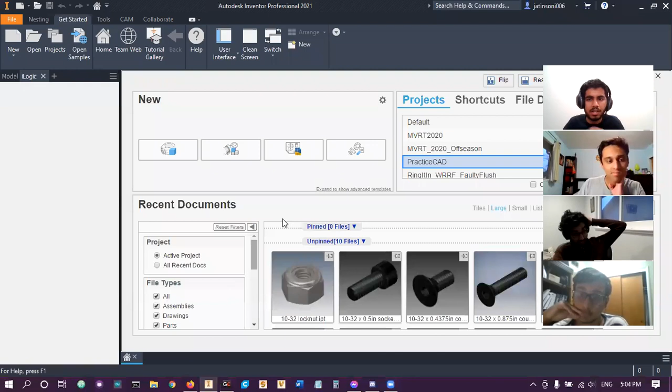So yes, first day of CAM training, what we did was we took this backplate here from a gearbox from a random catathon, and we basically cammed this. If you have Inventor CAM installed correctly, you would have a CAM tab on top. And what we did was we created a setup. So that's setting up where we're going to cut, how we're going to cut, which direction we're going to cut in, X, Y, and Z.

And then you have templates for camming, which have drill, adaptive, pocketing, and then the final shape. And then we also covered the difference between end mill and drill because they look similar. If you're machining for the first time, you might confuse them, but they're very different. A drill has smooth sides, so it only cuts up and down. An end mill has sharp sides, so when you rotate it and move it along a piece of metal, it'll cut a path out.

And then we just went through step by step how to CAM. There's a recording that's uploaded to the website, so in case you want to actually see the process, you can look at that. So that was that day. Going back to today, we're gonna cover nesting.

So basically, when you're machining during the season, you generally don't machine a single piece, right? If you have a drivetrain gearbox, you have a back plate, a front plate, and you have two of those because you have two gearboxes on the drivetrain. And then we do two robots, generally a practice bot and a comp bot, so that also multiplies everything by two. So you're gonna have to cut out a bunch of pieces at once.

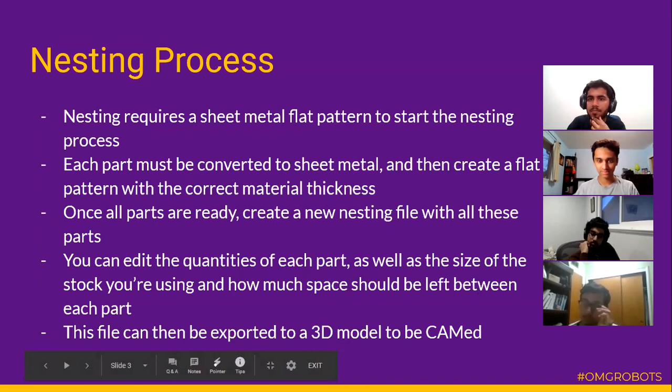Let's see, there's a chat. Oh, okay. All right, so do you guys have any questions as of now?

By giving the stock dimensions, does that mean if you restrict one, will it be adaptive in a direction? Does that make sense? Yeah. So you're basically restricting how big it can be. So it'll basically try to adhere to the dimensions you give it. And if there's just not enough space, it'll tell you that it doesn't work. It'll show some parts in red, so you're restricting it.

In terms of can you only do one dimension? I don't believe you can just say I have something that's 8 inches narrow, but I have infinite space. But you can just enter something like 48 inches. That's a lot. And so it'll be similar to if you did infinite space. Yeah. Okay.

Okay, if you don't have any questions, we can get cracking. All right, so we're back to this plate. Let me check again. I think I didn't save changes last time, so the thickness is off on this thing. This is one of my first CAM-a-thons, so this is very bad. But we'll change it to 1/4 inch aluminum, and we'll begin from there. Right, so I have my gearbox plate. I did CAM it last time, but I deleted the CAM.

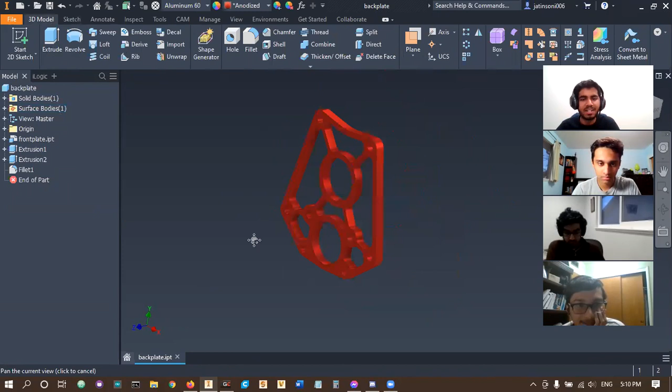And so what we're gonna do first is just convert it to sheet metal. So if you're in 3D model mode, on the top right, there's a button for converting to sheet metal, and you just click it, and it becomes a sheet metal part. All right. And so here, the first thing is if you click on sheet metal defaults, this is where some of the properties are.

And so if you set your materials correctly, it should already be there. Now, the important thing here is thickness. So it says here, checkbox use thickness from rule. We want to disable that, and we want to set the thickness to what it actually is, right? So obviously this is a 1/4 inch piece, so it should be 1/4 inch.

Yeah, it doesn't automatically pick up the thickness from your part. So you have to manually set that to whatever it is. If this was like an 1/8 inch part, you would say 0.125, or 16th inch, right? So on and so forth. Hit OK. So that's step 1 done.

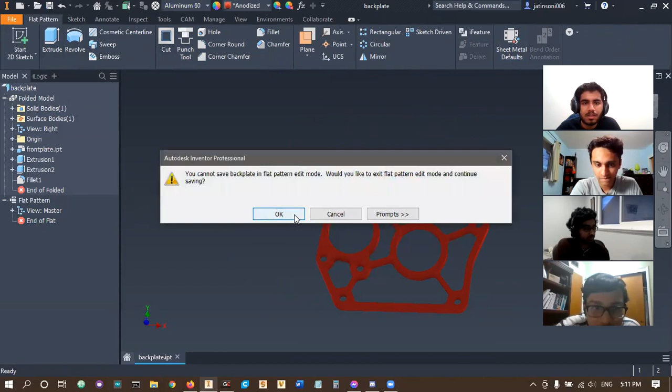And then the final thing we do is create a flat pattern on the right here. And it creates this flat pattern. You can see it's flat. That's all you need to do, right? And then you can save the file. Yeah, okay. So basically you can't save it in flat pattern mode.

It's like sketch. So you can just go outside of flat pattern, go to flat pattern, and where did that button go to go back? I'm confused. There is a button that says like go back to normal mode, but for some reason it's not there. Anyway, you create a flat pattern, you're done here, you save it, and then you close.

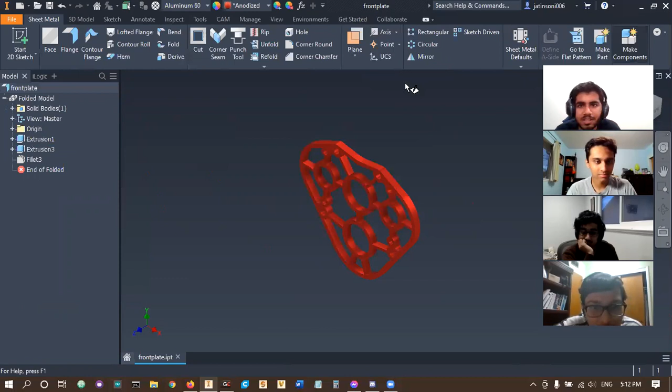All right, so actually I'll do another part because we're gonna show multiple files, right? So here's a different gearbox plate that looks to be 1/4 inch. So convert to sheet metal. Oh, contains features that are unsupported. Oh, I think that's the rule fillet. Okay, whatever. We'll do something without fillets, which sucks, but whatever. Sheet metal, use thickness, so 0.25, hit OK, create flat pattern. There's our flat pattern, save it.

There it is. Right, so now if you go on new, this is where if you have nesting installed properly, if you scroll down, there's now a new option, standard.inest, right? So this is what a nesting file is. So you hit create, and it'll take you to this tab, and it looks a little bit weird, but first thing is you go on sources. So this is where we're going to import our files, right? So you click on source files,

and you just click on the files you want to do. If you hit open, it will try to import them. Here, this box is your check to make sure everything's correct. So in case you forgot to change the thickness, here would read the 0.12 thing, but we changed it correctly. So it says 0.25 inches, aluminum 6061. Hit yes. And then it opens this thing.

You can expand it if you want to look at it a little bit more. You hit OK. Oh, what happened? Okay, Inventor just lagged out a little bit. Yeah, so we have it here. So you can see that's what the flat pattern is like. It's just a 2D face of whatever you're working with. So next thing we do is create nest study. And so here we can change our parameters. So you can change the name if you want to.

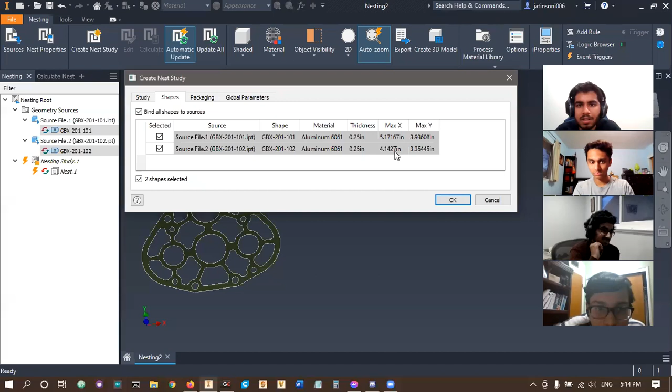Let's see. Here you can select if you want to unselect something. Here are their dimensions, right? And then packaging. So this is where you do how big your stock is. And I believe you have to edit the packaging elsewhere, right? So for now it's 39 by 19 and that looks okay. All right, we'll just go with it. And then global parameters, that also looks okay. So we'll hit okay and it'll do some loading and it creates that.

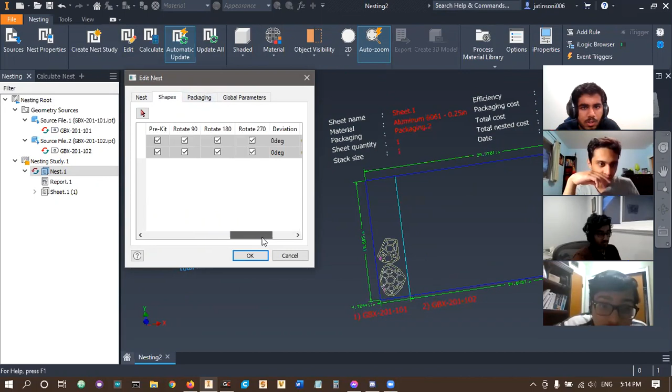There's our nesting. You can edit the nest. So if you click on nest here, you can edit it. And I believe this is where you change quantity. Yeah, it's been a while. That's why I'm saying I believe, but I'm not super sure. All right, so here you change quantity. So I'll just make this 3, for example. We can make this 2, right?

And then you can do other things like you can rotate it, you can mirror it if you wanted to. But we don't need to do that. So we'll hit OK. And then it'll automatically update. And there we go. So that's what it's doing. You see that? We have 3 of these, you have 2 of those. And I'm trying to find where the minimum distance thing is. So where did it go? Oh, there it is, right.

So item separation. Item separation is basically that minimum distance that should be between 2 parts. And so if I was using a 6mm end mill, which we generally use, it's like 0.23, so it's basically like 0.25. And so if I was doing this, I'd just do 0.55. Where did I get that 0.55 from? It's 0.25 plus 0.25, that's 0.5, and then plus 0.05. It's 0.05, not 0.005. I think I misspoke last time.

Wait, where'd you get the 0.25 from again? Oh, so that's the diameter of your end mill, right? So if we're using 6mm, it's like 0.23 something. So that's close enough to 0.25. So I just use 0.25.

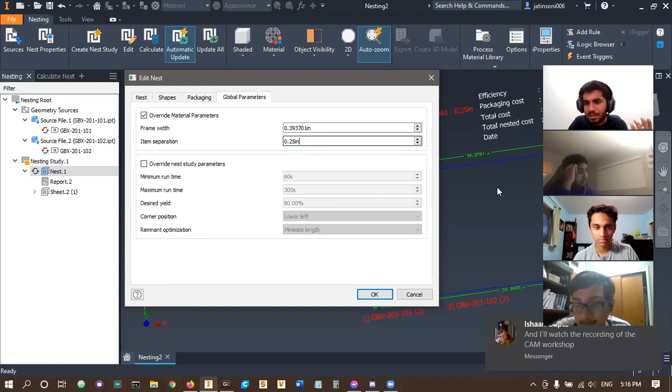Do you guys see notifications by any chance? Oh, okay. All right, don't worry about it.

Okay, so yeah, so I just do 0.25 here. And then this is like maximum runtime and stuff. This is basically if it takes too long, you can limit the time it takes, but we don't need to do that. Hit okay, and it should recalculate. And now the separation is bigger. You can see that distance between them is bigger, right?

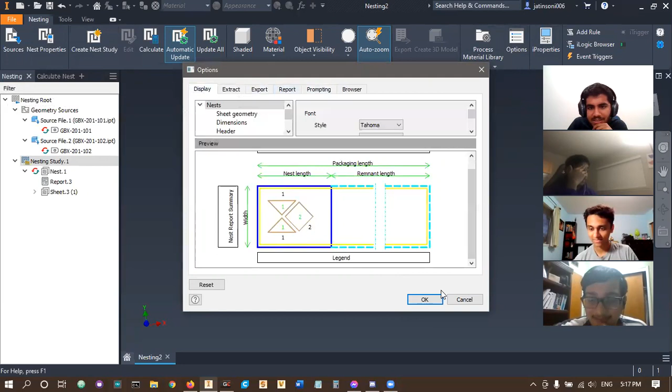So there's our part. Let me see if I can find the packaging thing, like the size. Oh, there it is, I think. Oh, okay, I believe I did do this in my video. I think I need to rewatch my own video to do nesting. But anyway, once you get to this step, you click on the sheet portion here, and you do create 3D model. Right, so this is what's going to create a 3D model.

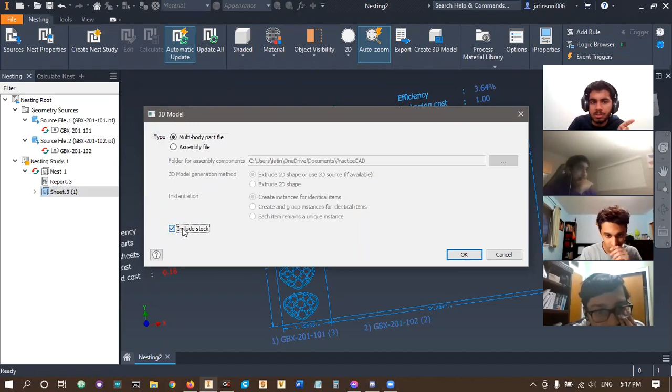Now here it gives you multiple options. We don't want to do an assembly. You can just do a multi-body part file. The difference is it'll create an assembly where each of your plates is a part, or it'll create one IPT file where each of your pieces is a body. Doesn't really make much of a difference, but we just do multi-body part file. And then you don't want to include stock. If you do, it'll create this huge rectangle and you're supposed to cut your pieces out within it, but we don't need that.

So we'll hit OK, and it will create a new part. There we go. So this is our new part, and it laid out all our files, and this is 3D, right? If you didn't set your thicknesses correctly, this is where it would be super thin or something. But you have your new part here, with all your gearboxes and things. And that didn't take me much time, whereas in assembly I'd have to figure out the best orientation for all of this.

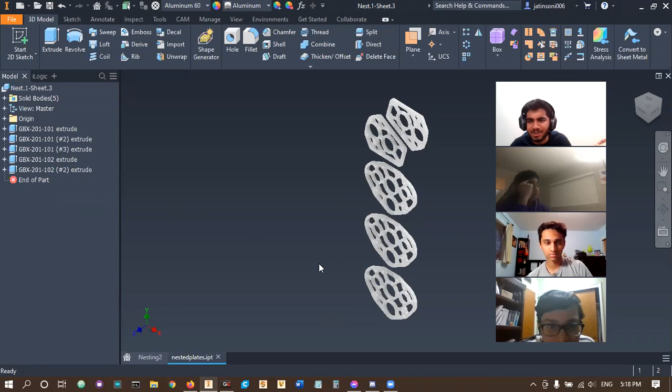So once you get to this step, make sure you save the file, and we'll just call it nested plates, something. Now this is where you can begin the CAM process. What we did 3 days ago, we're gonna do the same process here. So far, any questions on nesting?

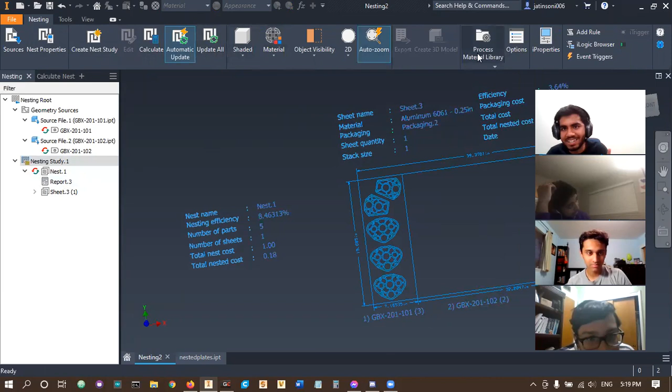So you had that layout thingy that gave a little box around it. How does it know? Is that a random value or is it based on the CNC that we use? Oh, so these values here? Yeah, that's the packaging thing I was talking about. You can set these values to whatever you want. I currently do not remember how you edit that value. I figured it out during the season and did that in my video, but I just arrived where I am right now, so I didn't have time to tinker around. Sorry for that.

Let's try something. What's he asking for again? Packaging, like editing the packaging. That's what I'm looking for. So this number is what I want to edit. Let's see. Can I create a new packaging or something?

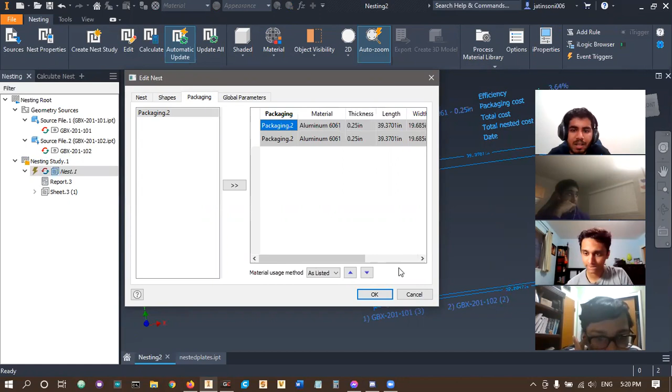Nope. Okay. Yeah, so it has to do with the packaging. You find the packaging, you edit that, so you create a new packaging basically. Packaging is just like where everything should go. That's your bounding sort of thing. Yeah, I'm having a hard time remembering where it was, because I have not done this since like fall season.

If any of you guys are on Inventor, you want to try to look around, that would also work. Okay, we'll skip it for now. If I figure it out, if we end before time, I can try and figure it out and do it. But what I'll do here is we'll redo CAM.

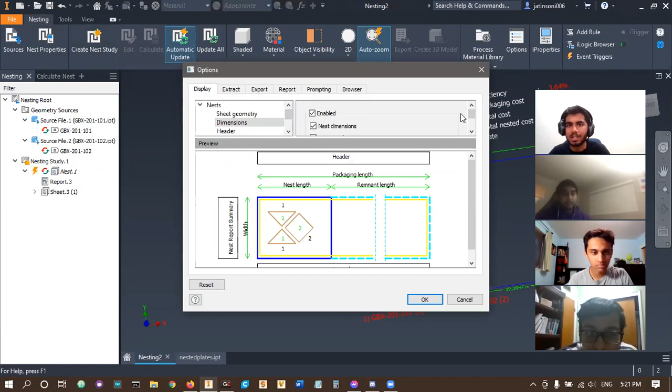For that thing under options, it had dimensions as well. Did you click on that? Where was that option? The thing that you're on, to the right. Like here? The options. Oh, options, that thing. Yeah. It said dimensions. No, I think this has to do with what it shows you. So all this green stuff it shows you, you can uncheck some of the things if you don't want to see it.

Let's see. Okay, yeah, I'll skip it for now. It's not a huge deal for nesting. There's more important things right now. You guys have to learn camming, which is far more important than nesting. So we'll revisit it, right? I'll make sure to send out a message saying how to do it. So don't worry, I won't leave you guys without tools.

But okay, so what I'll do now is I'll transition into CAM. So if you were here last week, how about you guys guide me through what I should do? So I am on the CAM tab. What should I do first? Setup. Setup. Do I click on it or what do I do? I have to be more descriptive, man. Click it. All right.

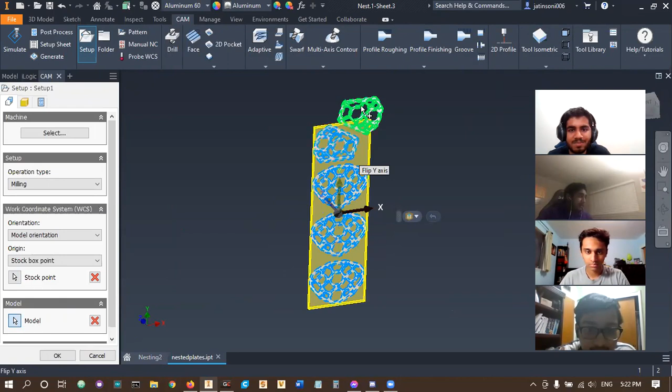Now what do I do? Click the model. So hit the model arrow, and then click what you want to select. I think click all of them. Yep. Click all of them. Sounds good. And then hit the yellow box and then remove all stock. No additional stock. Yeah. All right. Let's have a different voice. Arnav.

Now we have to set where the origin is. So okay. You have to scroll down basically. Scroll down. There's nothing here. Sorry. Maybe third tab. No, it isn't. Is it the second tab? Wait, were you on the first tab or the second tab just now? I was on the first tab, sir. Okay. It's the stock point. So you have to change the model orientation, or is it the stock? The model orientation. There we go.

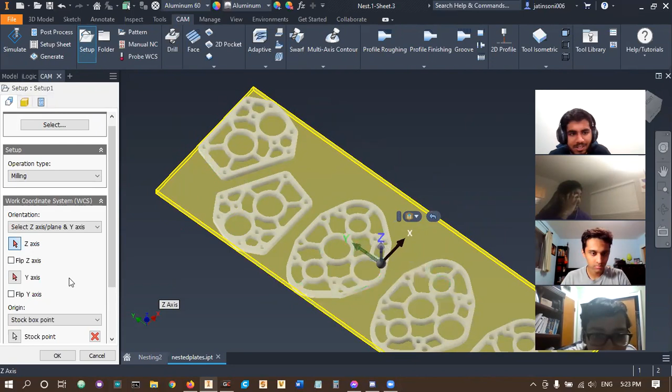Choose one of these. And then what do I choose? The z-axis should be up and down. So you choose the height of one of the plates. Oh, okay. The z-axis is already good to go, so I don't need to change it. And the y-axis would be the longer side. So these gearbox plates are, oh, we can actually do an x-axis. That's better. There we go.

I don't think Jonathan brought this up last time because he used a line, but you can also click on faces for axes. And so when I did that, it messed up the Z. Wait, doesn't that mean your origin point is on the center? Like when you had that little contraption. Oh yeah, I have to change the stock point as well. So which corner should I do?

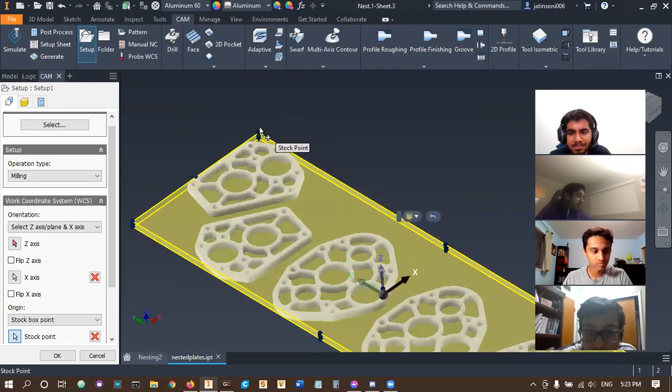This is based on the actual CNC, but generally when you're doing plates, we do the top right because that's how the Laguna and the Omi are set up. Don't you do any of the four corners? Yeah, you can technically do any of them as long as they are in the right direction. Like right now, if I were to cam this, you see how the X and Y are pointing out of where my plate is? My machine would basically try to go in reverse, and that's not going to end up too well.

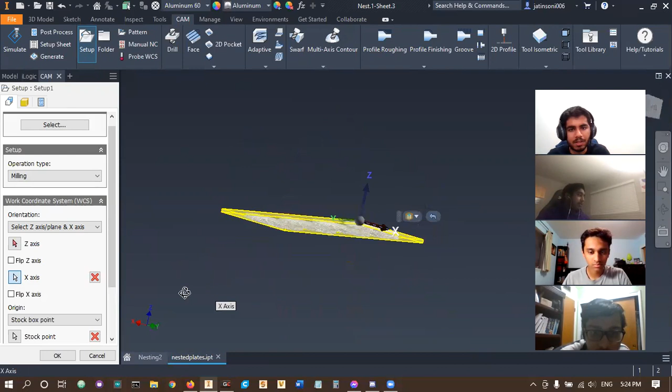So technically, if you put it on the bottom left corner, wouldn't that work? You wouldn't have to flip anything. Yeah, that would also work because then if I orbit 180 degrees, it's on the top right. So that also works. All right. So is our setup done or do I need to do anything else?

You guys can speak. I just saw a thumbs up. I haven't heard a single word. Okay. All right. Great.

All right. What's the next step? Should I do a contour? Malvika, what do you think? I don't remember, but I think the contour. So I do the contour? Are you positive? No. No. All right. So let's think about this, right?

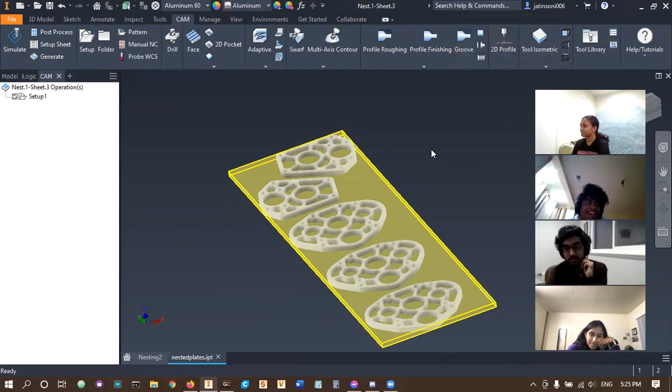If I were to do a contour, so this yellow box is like the aluminum I have, right? And the contour would be the outer shapes, right? So if I were to cut out the outer shapes, what would happen to this whole middle piece here? Like fly away. Yes. So how do I prevent it from flying away? The answer is not super glue or flex tape. So what should I do first then?

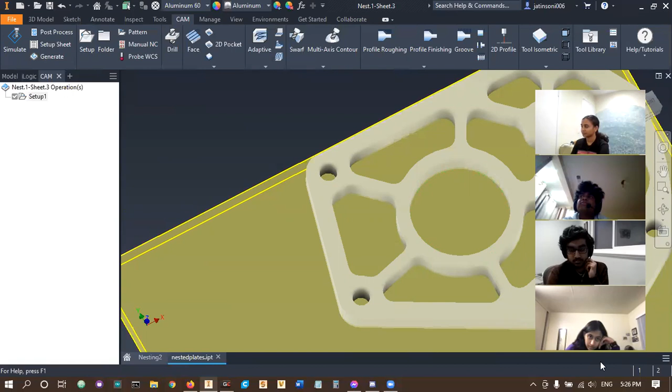I forgot what it's called, but like you have to do the inner parts, but I don't remember what it's called. Yes. So the inner parts could be the pocketing or the holes, but yes, we have to drill holes first, basically. So now that you guys know we have to drill holes here, how do I drill holes? Someone other than Malavika, Jacob, and Arnav.

Bhavik. I don't know, man. I joined late and I forgot this. All right, that's fine. Isn't there something like new operation or something? I forgot. Oh, Mr. President remembers how to CAM. Wow. All right. And then you just select the MBRT template. Yeah. Yes, there we go.

The drill. Which one from here? Drill, aluminum drill. Yes, that's correct. Okay, so you choose the right holes. Yeah, right click, create from template, aluminum drill. And then we double click on it. And then it loads and you pick on the hole you want to do.

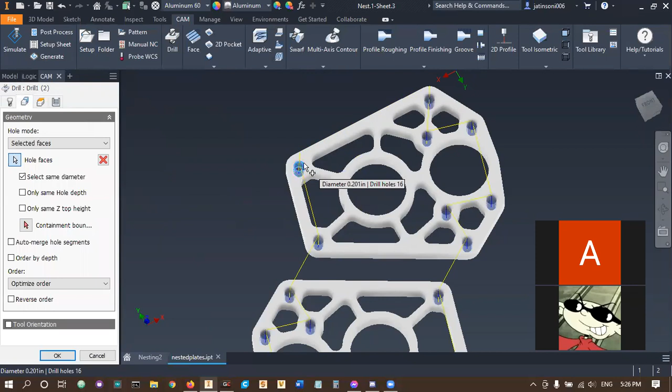So in this case, these are, I believe, 0.201, right? The tapped 1/4-20s. So you see how it selected all of those, right? But these ones are different sizes, so it didn't select them. Right, so what do I have to do here? I'm pointing to what is incorrect right now.

You have to change the size of whatever is drilling because... Yes, I have to change the tool. So you go in the leftmost tab, you click on tool, and then we said this was 201, right? So if you don't remember your hole size, you can still just press M, or maybe that's not gonna work. Measure, right? And you get your diameter there.

And then you double click again, pick on the hole, go in tool, change it, and make sure you have the MRT tool library. So you change to the 0.201 drill right there, select, and now you see the two cylinders are the same size, right? So there's that.

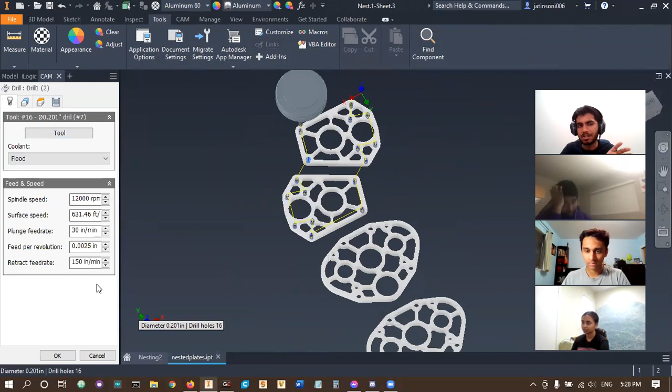And remember from last time, these speeds here are the base speeds that we have tested on our CNCs and they work and they're safe. They're not crazy or anything. So these are surefire speeds. You can go with them and it won't cause a problem.

When you're actually machining in the season, sometimes you might be pressed for time and you might want to change these to make it a little bit faster or slower. Also, if you have an end mill that's really dull, it's weaker, right? So you can't cut at the same speed, so you might want to slow it down a little bit. But other than that, you generally don't need to change these values too much.

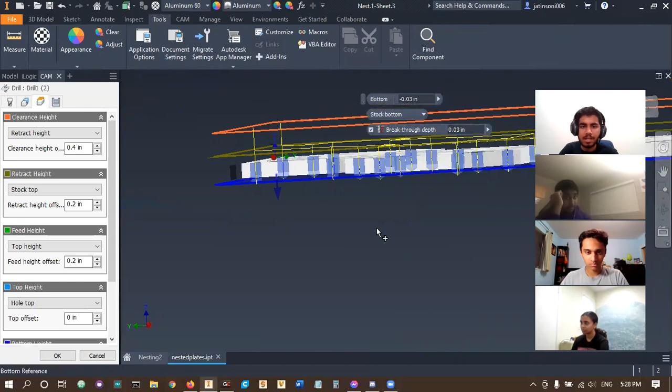And then these heights here, so I'm just doing this as a review of CAM. So if you find it a little bit boring, it's because I'm reviewing. But the heights here basically define, the orange was the safe height. This, I don't know what color, dark green, the retract height here is how far it goes up between two holes that it drills. And then the blue one is the bottom, how far it goes when it drills.

And you can see the blue is actually a little bit below our aluminum. And the reason for that is so that we make sure we cut through every single time, because our table isn't super flat, and it could have differences from one side to the other. But yeah, there's that. And then this last tab is basically how does it drill, and there's all sorts of options.

So the first one, called rapid, just goes in and out, right? But the problem with that is when you do that, you're cutting a lot of aluminum at a single time, and that can cause the drill bit to heat up and other problems. So what we do is called chip breaking. It's like a woodpecker where it goes down a little bit and comes back up, goes down a little bit more, comes back up, and so on and so forth.

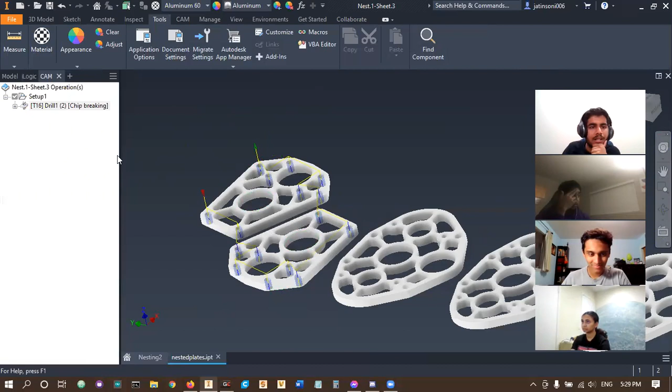And the numbers here are basically how far does it go down? How long does it stay there? Does it just pause and take a break? You do all that, you hit OK. There's our drill, right? And so I still need to do these two other hole sizes that are on this plate. So let's have a different voice tell me what I should do.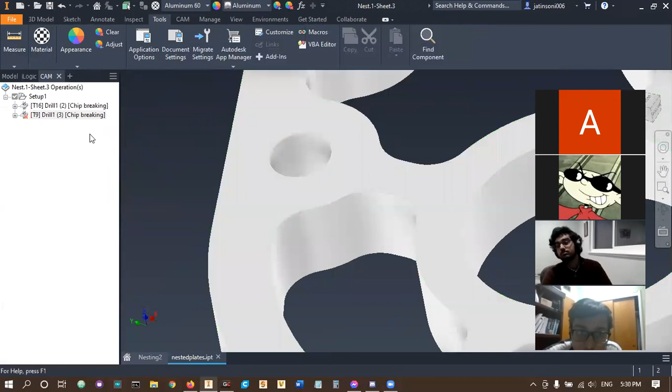You can just right click and use the same template that you did for the other holes. Mm-hmm. All right, I'm gonna do that. And then let's select this one. That one should be 0.196, but let's check. So I'll press escape, and why is my measure tool not working? Anyway, measure 0.196. So we'll go back here, click that hole, and then we have to change the tool. We'll go in here, MBRT library, change it to 0.196, select.

Again, the speeds change based on what tool you're using. And then same thing as before, right? The numbers are a little bit different, but it's the same things. You hit OK, right? And then the final one, aluminum drill, double click on that, and we'll pick the bigger hole this time. Change our tool to 0.257. That's the 1/4-20 clearance drill bit.

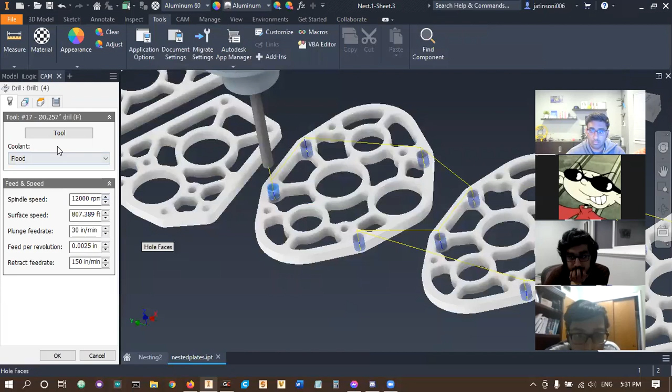And none of you guys are confused about why these numbers are what they are, right? The 0.196, 0.257? That's because 0.196 is if you're using 10-32 screws, they can slide through. 0.257 is 1/4-20 screws can slide through. And 0.201 is you want to tap the hole for 1/4-20s. The heights and the numbers there, okay.

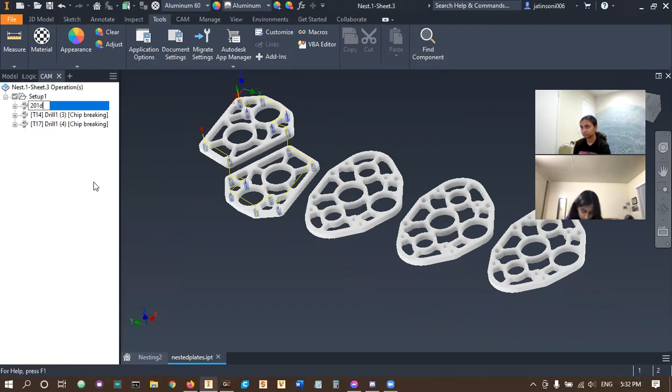Right, so another thing we didn't get to last time was we have these 3 different drill bits here. Obviously this is kind of confusing because it just says drill 1, and there's other numbers like T16, T14, T17 that signify which tool it is, but I don't remember those numbers. So what I generally like doing is renaming these. You can either right click rename or double click slowly and change the name to 201 drill, for example. And you can make this 196 drill. That way it's easier to identify it if you go back later and want to change something. 257 drill.

And generally what we like doing when machining is going in ascending order of tool size. So you'll start with the smallest hole, the 196 one, and you can just drag it to change the order, then the 201 and then the 257. The reason is when you're actually working on the CNC, it's easier to go up in an incremental order than a random order. It also helps because the smaller holes are easier to cut, so things vibrate less and you can put screws in and everything's fine.

So I have a question. Uh-huh. Don't you export each template individually in different files, essentially G-code files? Oh, the drills, yes. So couldn't you just rename it then? Couldn't I rename them? Oh, okay. What you're talking about is when we post-process, right? You can have a file name there. That's different because post-processing is the file that runs on my machine, the CNC. So yes, you have a name there, but this name is different because this name is inside my Inventor.

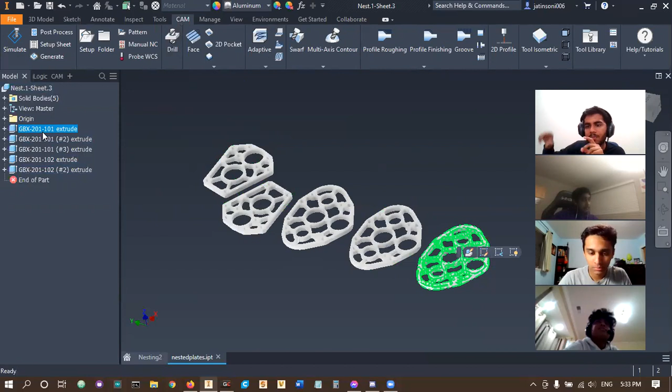It's like the equivalent of if you had a model called Gearbox 201 and you exported it into Cura to 3D print it, right? The 3D printed thing has a different name and this has a different name. The reason for writing a name here is so that if someone else opened this CAM, or if I open it later or go through it again, I can identify what it is without having to double click or measure. It's two different things. The two files are separate.

So that's why. Also, if you put the USB into the Laguna, it shows each process and takes whatever file name is given on there. So you can also use the name that you export it with. Well, that comes with the exporting name, but it takes whatever process you have as default. I think it takes it default, right?

Like if you were to post process a single 196 drill.

By the way, your camera's flickering. Yeah, give me one sec. I need to turn on the lights. Something happened.

But I'm pretty sure that if you were to export a single process, then it takes that name as the post processing file's name by default. So that's also good, because it doesn't really save much time, but you'd want that so that if you were to plug it into the Laguna, you know what process it is, right? Because if you have all your files on that USB, it's hard to discern the difference between each file. So yeah.

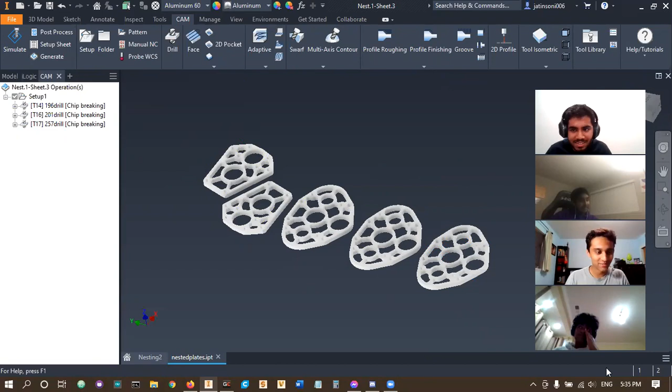That was an adventure. Okay. All right. Where the hell is your light switch? That was like 20 minutes. No, something random happened.

I don't know. Okay. So what should I do next? I'm done drilling all my holes, and if I was on the machine, I would put screws in them so that they don't fly away. What should I do next? Oh, create more templates for the pocketing. The pocketing. Yes. Should I also do a drill for the bearing holes? No, because we don't have a drill bit big enough. We have a drill bit that's big enough, but it doesn't work on CNC. So we'll do create from template.

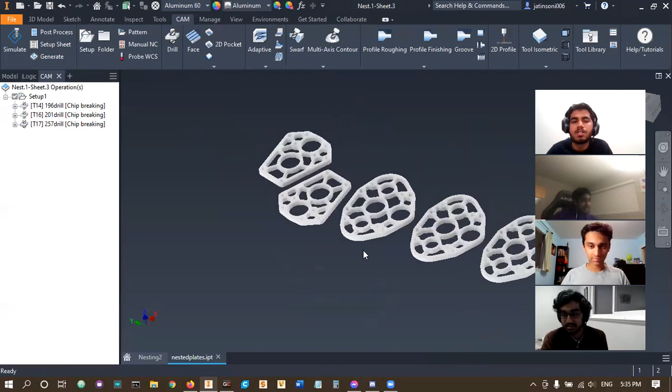Wouldn't it be better to put a hole in the bearing and then do a contour so that it won't take that long during adaptive? So that's a good question. You could do a contour and put a hole in the middle, but the reason why we generally don't do it is because, in terms of preparation when you're camming, let's see, how many bearing holes are here? 4, 6, 8, 10. There's 10 bearing holes. I would have to make 10 drill points here, right? So that takes me time in my CAM process. And then I have to actually go on the CNC and do that.

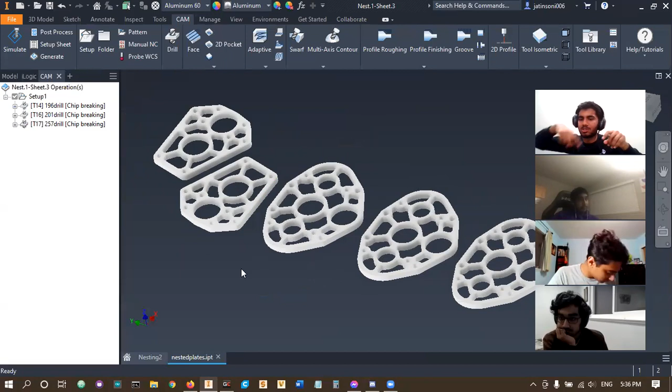And with those pucks, we call them pucks, the things that fly out, you can't use one hole. I know it's a circle, but you have to use 2 points so that the thing doesn't start rotating around that one place where you screwed it in. So you actually have to put 20 drillings here. And in real life, you would have to drill 20 more holes and put in 20 more screws so your bearing pucks don't fly out. So you do all of that work to save not that much time, because a bearing hole is only one and some inches wide and adaptive doesn't take that much more time than contour. That's why for this, we wouldn't do it.

Although if you had something like a swerve plate, let me find one. Where could it be? Give me one sec. Where is it? No, not that one. Where did it go? Okay. Let me just find it from here. So if you had,

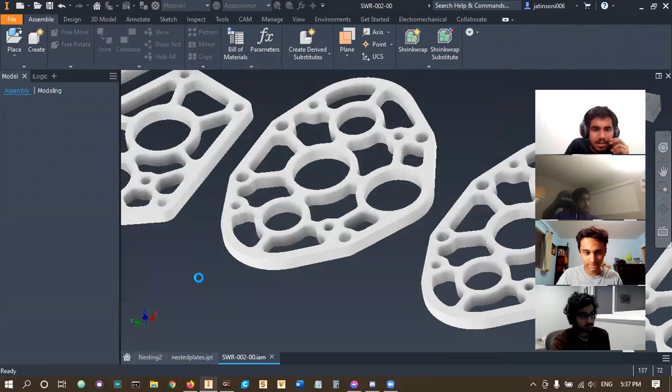right, if you had one of these plates with this huge 4-inch hole in the middle, now this adaptive would take forever. So this is where putting the screw holes in is actually efficient, because you spend a little bit of time in your CAM, but it saves you so much time when you're actually machining, right? But for bearing holes, it's not that big a deal. And we actually did this when we were machining the swerve for, what was the team number, 604, yes. It's been a while.

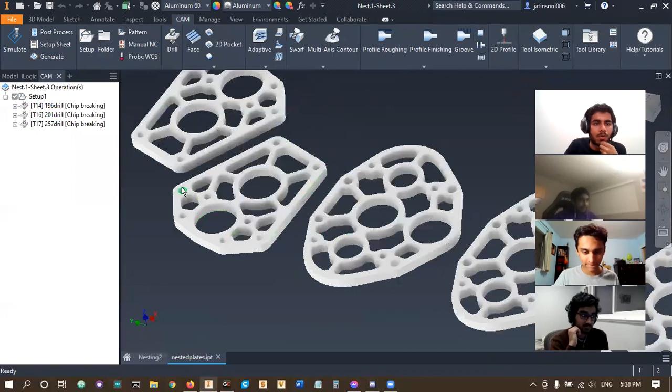Okay, there's a chat. Could you go over what I mean by screw holes? Okay, screw holes is, let me do contour real quick. So if I were to do a contour for, let's say, not that, this bearing hole here.

Let's simulate that with some stock. All right, so there it is. Okay, so when I do a contour, it creates what we call a puck. It's just this little piece of aluminum in the middle that's circular that can fly off because it isn't supported by anything, because everything around it is cut.

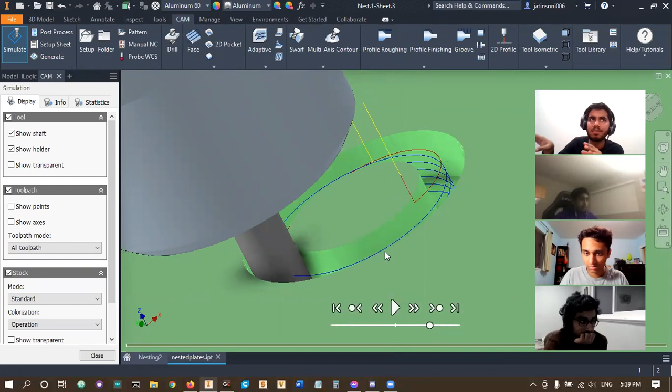And so a screw hole would be, you basically drill a hole in this middle piece before you do the contour so that you can put a screw inside it and so that it doesn't fly off. So that's what a screw hole would be in terms of pocketing and getting away from doing the whole adaptive thing. Yeah, so that's that.

So when you're drilling with the CNC, you use clamps? Oh, okay. Yeah, that's another good question. So when we were drilling the first holes, we have our huge piece of aluminum on the table, and we basically have clamps around the edges of that aluminum to keep it from going anywhere. And then once you drill the holes, you can hold down the parts where you're cutting. So yeah, we do use clamps for the edges basically.

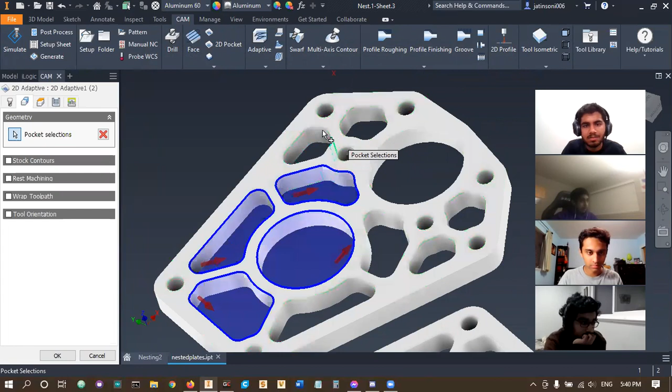Right, so let's delete that contour and let's do our adaptive. So create from template, adaptive, double click that. And then now we do the fun stuff, which is just selecting all the pockets. There's a 6mm end mill, so just select, select, select. Now if you're camming this, you can select every single pocket at once, right?

But the Laguna's handheld processor is not very good. It can't hold a lot of data at once, and because adaptive does so many circles, adaptive operations are really big in terms of file size. And so generally on the Laguna, if you were doing adaptive for like 5 different plates, it might just stop on the 3rd plate and forget what it's doing basically.

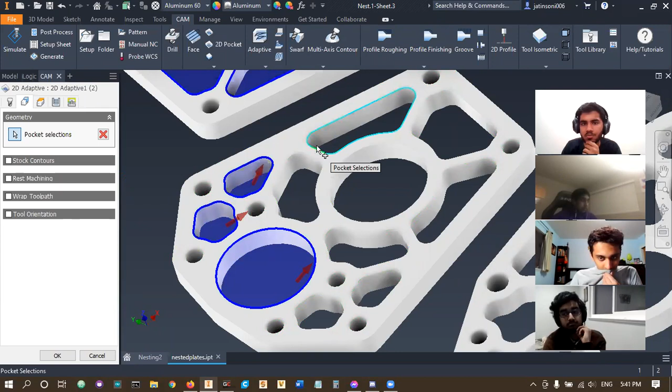So generally what I do if I was working on a Laguna would be do adaptive for all of the pockets on 1 or 2 plates, and then do a different operation, so that you split up the load between 2 files instead of just 1 huge file. If you're using the Omeo, it doesn't matter, because for the Omeo the controller is the computer you have hooked up to it, and Mr. Shinta's computers are good enough.

And then if you use your own computer, if you can run Mach 3, it's fine. It works. I actually had that problem. My old computer couldn't run a whole operation on the Omeo. Imagine.

Also, similar to any other process in CAD, if you accidentally select something that you don't want to, just shift and click again. So I'm gonna deliberately select this one, and that's wrong. So I'm gonna press shift, and I can click on it again, and it goes away.

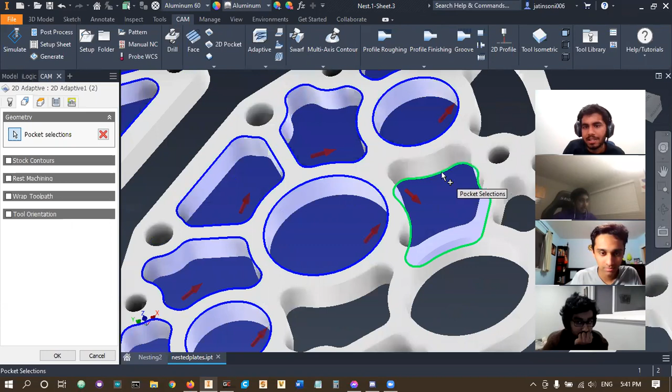Yeah. It's very easy to mess up, as clearly Jatin has messed up like 5 times so far. Yeah. Don't mention that.

If you were to mess up, then shift click is the easiest way. You don't have to stop, you don't have to delete everything and restart. So if you were going to use the Laguna right now, you would only select those 2 first plates and then hit done, okay, and then create a new adaptive operation. Yeah.

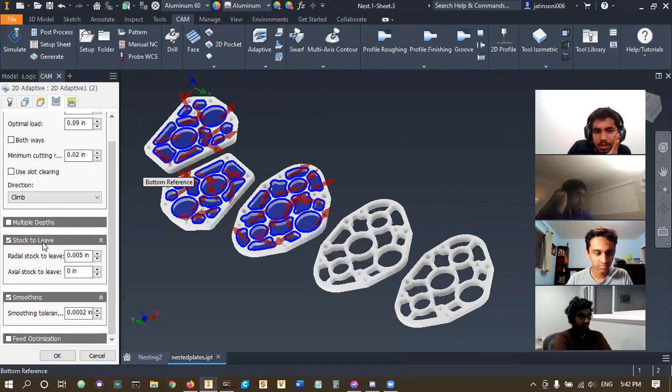So for the sake of time and not boring you guys watching me click a whole bunch of pockets, I'm gonna pause here with 3 plates. So the height thing again is the same here. Now going into this tab, you have a couple of options. So the first thing is stock to leave, right? This is an option that basically allows you to undercut or even overcut.

What it means is, if I have a bearing hole that's 1.125 inches, I can add a number here so that I only cut 1.1 inches or 1 inch or 0.75. And why would you want to do that? So basically when your end mill is going around cutting all of this aluminum out, it's doing a lot of work and it's fairly stressed out. And so the quality it leaves behind on the aluminum isn't always the best, because it's doing so much work.

And so if you want your final product to have really good quality, but also not take forever by going super slowly, what you can do is you can leave a little bit of stock. So you cut 1 inch super fast, right? And it looks really bad. But then the last 0.125 inches, you do really slowly so that you leave a really nice finish at the end, right? Because the end part is what matters. The middle portion we don't care about because it's just flying into chips.

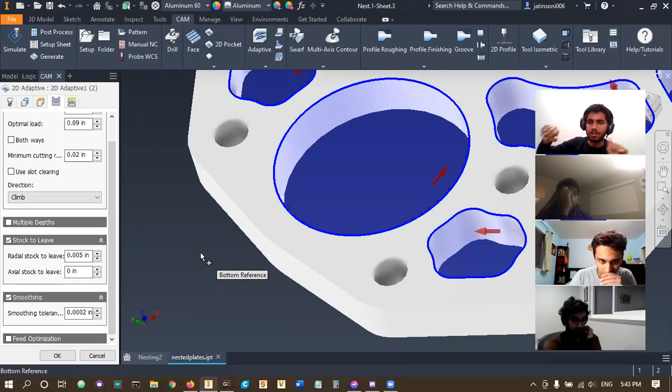So what you can do is you can leave a little bit of stock, radial stock to leave 0.005, and then you can come in again and cut away that 0.005 so that you have a really nice quality finish. Now, for the pocketing, not the bearing holes, it doesn't matter, because you might care about the finish, but it doesn't actually matter if it's too small or too big because it's 0.005 inches and we don't actually use pocketing, right? So you can choose to leave it on or not. I think last time I didn't leave it on, so this time I'll leave it on.

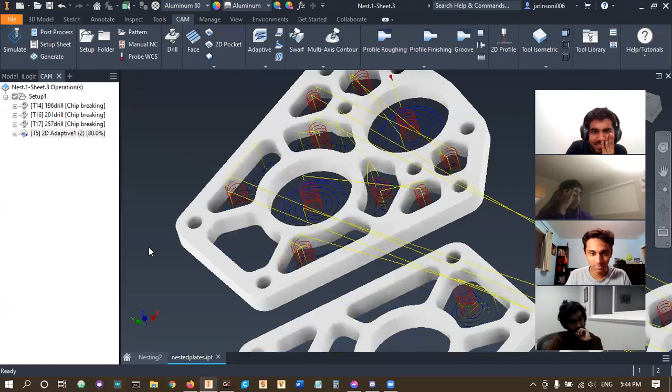Hit OK. And then now it's going to do the calculation, so it's going to take a little bit of time. And hopefully my computer doesn't crash. Oh, it's loading. It's almost done. There we go. It's done. Yay. Okay. So that's what it looks like. And the yellow spider web of lines.

So I guess I could just cover the colors real quick if you're confused. So the red is like it's starting something. You see how it's like a coil? It basically starts at the top of the aluminum and helixes down into the aluminum. And the reason why it does that is so it can create a cavity for itself so it doesn't get stuck. The blue is the whole cutting portion. The yellow is basically when it's not actually cutting anything, it's just moving to the next place, right? So the yellow between two different holes is it moving out of this pocket, going to that pocket.

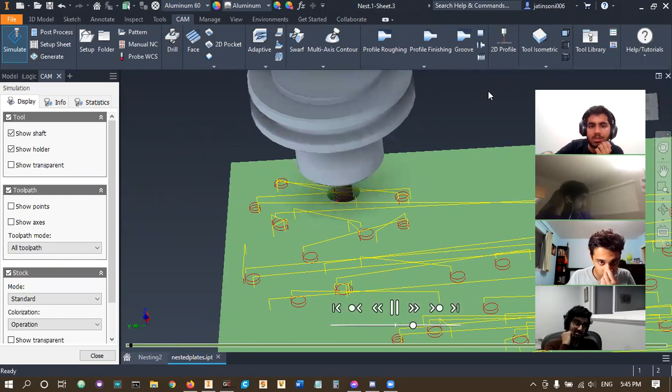And then if this is your first time doing CAM or you haven't actually machined anything, you can hit simulate and you can see how it actually does it. So I'm going to slow that down and hit play. And so it's going to come down. It's going to do the helix thing. Actually speed it up a little bit. Does the helix thing. And once it's all the way through, it starts going around and around and doing the shape that you want it to do. So in this case, I think it's a bearing hole.

Yeah, so it's just going around and around and around. Then it'll move over to the next part, right? And then we'll look at it from the bottom this time. So it's doing that. And then it does movements around wherever it was doing the helix so that it can cut out the final shape. And you can speed it up and see it's doing that, and it moves over to here.

Now, this is something that for some reason Inventor CAM does that I haven't been able to figure out. Andy, who was here before us, also hated this feature. But when it does adaptive, why is my adaptive not loading? Oh, there it is. Okay, so when it does adaptive, it would do this hole first and another hole there, and it moves over to the next plate, does those holes there, and then it comes back and does this one, and then that one.

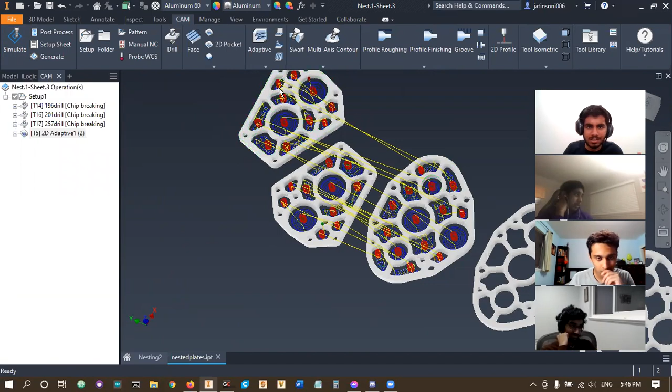It moves across horizontally instead of doing all the holes in this area and then moving to the next one. So it does that, which I think takes a little bit more time because it has to do all these movements. It's not a big deal, but if you want it to be more logical or more intuitive, where it does all these holes first and then goes to the next one, you can just do different operations. It's not a big deal, but yeah, that's a quirk of Inventor CAM.

Wait, so when you're actually CNCing it, it won't do that? No, it will do this. It will do basically whatever it shows here, where it will do these 2 holes or 3 holes, and it'll move over to the next one and do those.

But it's not a big deal. It's not gonna take an extra hour because of it. Only thing is, sometimes I want to do one plate first, check what it's like, and then move over to the next one. If it's failing, I can change my CAM.

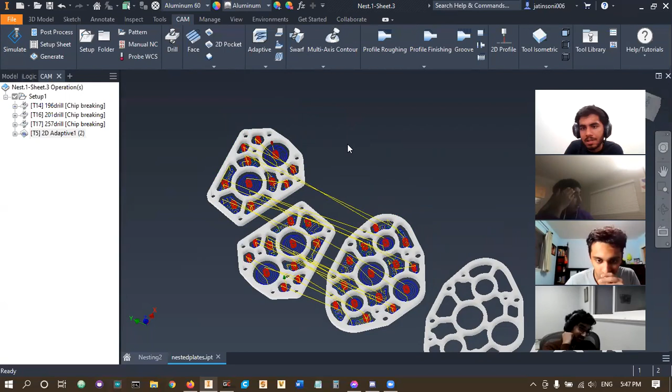So in that case, what you could do is do another adaptive, right? And then you just select the entire plate. You do that first plate, and then if it looks good, you can go over to your next plate. So that's one way to check what you're doing, make sure everything works. If there's anything wrong, I can go back and change it.

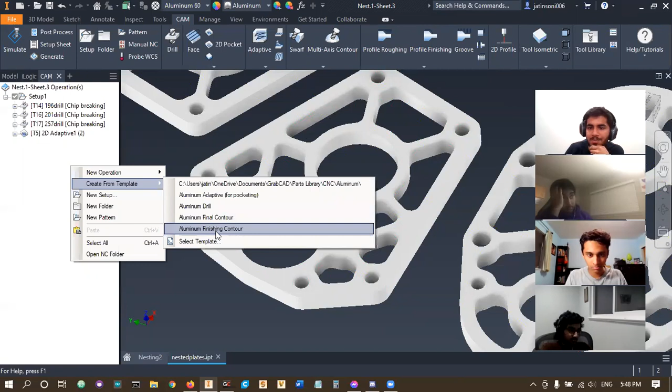Yeah, so remember that we did stock to leave. So that means this is actually going to be 1.12, not 1.125. So what we're going to do is use this last template called finishing contour. The difference between final and finishing is final is the final shape. Finishing is adding that finishing touch to it. So that's how you can remember it. If you have a better name suggestion so that it's not as confusing, please let me know.

I can change that. And so now I'm just gonna select the bearing holes because the pockets again don't matter. So we're gonna select the bearing holes. Nope, not that. That one. So the finishing contour is only usually used for big holes or something? Finishing contour is for when you have that last 0.005 left and you just want to cut that out.

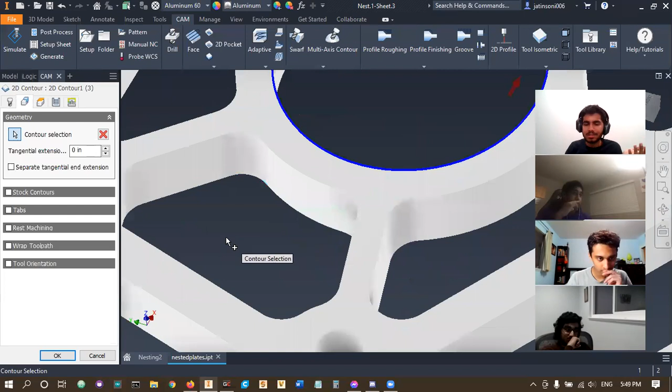So why didn't you do it for your other parts, not just the bearing holes? Oh, you mean the other pockets? Yeah. So the reason why I didn't do it is because the size of these pockets doesn't really matter, right? Because they're only there for saving weight. And if there's 0.005 inches of aluminum that's extra, it doesn't really matter because there's no screw going in there, there's no bearing going in there. So that exact size is not important.

That's why. Because again, I could select these and I would get a really nice finish and it would be the right size according to my CAD. But the problem is it'll take you an extra 20 minutes, 30 minutes, depending on how much you're doing. So time oftentimes with machining is more important than having the perfect size for a random pocket. And you could probably do these ones as well because this is where the motor pinion goes. So if it's too small, your motor would get stuck.

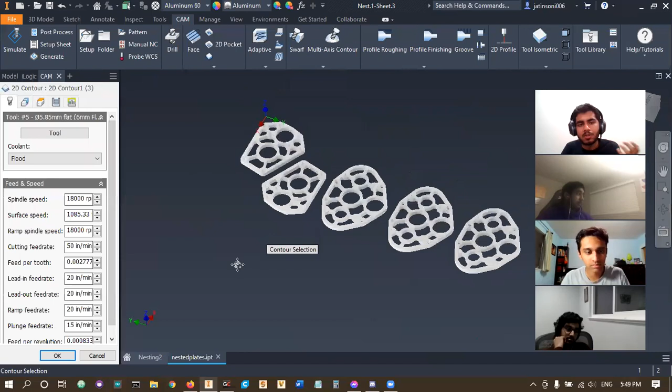So do those. And so you might think, what's the difference between this contour and the other contour we do to cut out the final shape? The difference is actually in the speeds here, and also in the other tabs. Basically when you're doing the final shape, you have to cut out all of that aluminum around the plate, right? Versus when you're doing this finishing thing, remember we already cut out a hole here. All we're doing is cutting away that last 0.005 inches so that we have a really nice finish.

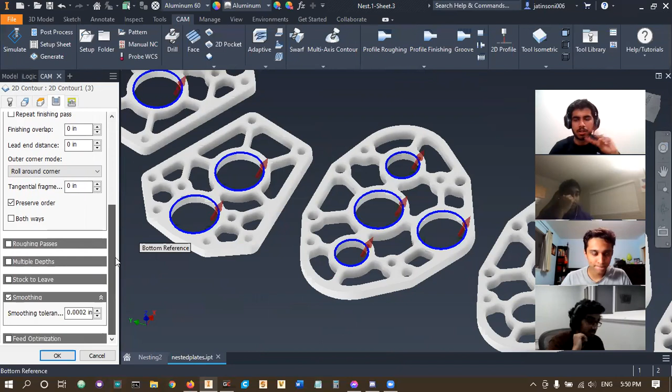So over here, my end mill has far less stress than when it's actually cutting out that final shape. And so that's why the numbers here can be faster. I can get away with not having a ramp down. I can just go straight in, cut that last 0.005 inches out. So this is why there are two different contours. They're not the exact same thing.

And you can do the final one on this, it would just be slower, but you can't do this on the final shape because it would be way too fast and you would kill your end mill. And also Mr. Shinto will yell at you for being bad.

Hit okay. And so it just comes down one time and does that one pass basically. That's another difference. It only does one pass. It cuts 1/4 inch of aluminum at one time instead of doing super small bits. And then I have all this adaptive and contour here. So again, I generally like to change the name to 6mm adaptive. And let's make this 6mm finishing. Right, so what's the final step if I want to cut these first 3 plates out?

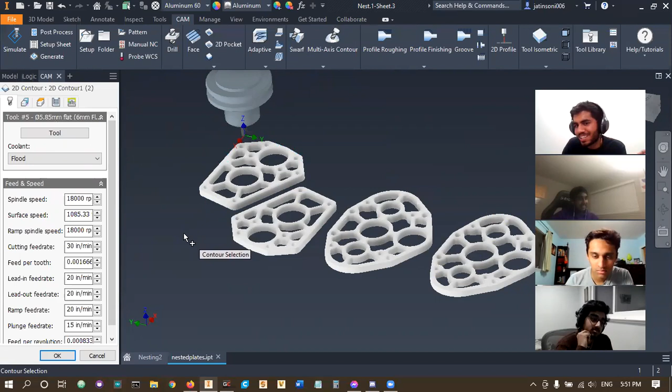Anyone? Like, other? Contour? Yes, it's final contour. Yeah, so we'll do final contour. Couldn't you just call it contour instead of calling it final? You can call it contour, but the other one's also contour, like the one where you do finishing on a bearing hole. So you can call it either. It's up to you, but I just want to have it separate so that you don't get confused, because they're both contours, but there's a difference between the two.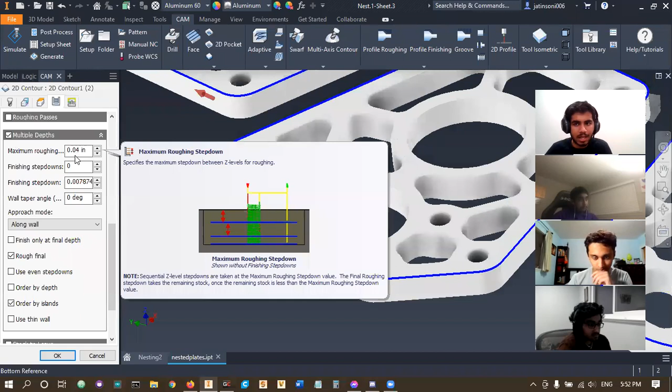So we'll select the outer edges here. And then again, the speeds here are set based on the machines. This is one place where the two contours differ: when we do multiple depths here, that's basically saying we don't want to cut all 1/4 inch of the aluminum at a time. We want to cut a little bit at a time, so we're only going to cut 0.04 inches. Where do we get that number from? We just tested what number works where it's not cutting too much, but it's also going at a reasonable speed. You just do 0.04 inches at a time until you get to the bottom.

And then this last bit here has a ramp. So we ramp into the aluminum instead of just going straight in. The reason for that, again, is it's smoother and it doesn't hurt the mill as much. Hit OK and it will generate, and you can see that multiple depth option here because you have multiple blue lines. So it's going to go around multiple times.

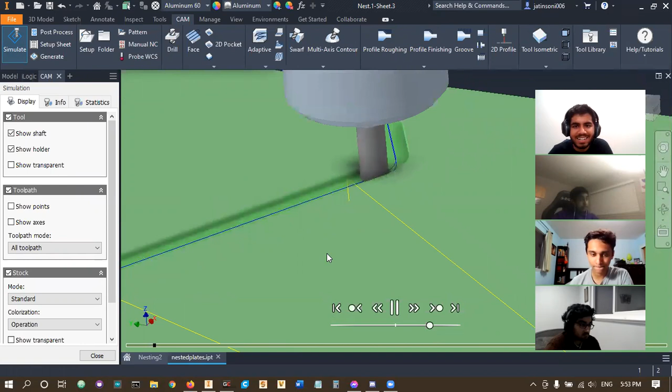And what it looks like when you do a simulate is it comes around. You see it only cuts a little bit at a time, right? So it's going to come around again. There it is. It's going to come around, it's going to cut a little bit more. You can speed it up. Comes around, cuts a little bit more, a little bit more, even more, and there it is. It's fully done cutting everything.

Now we'll go on to the next plate, right? And this is where you can see our nesting working. You see how these two plates are separate. Actually, I'll speed up a little bit more. And there was this gap in the middle. So we did the 0.55 thing, right? I'll just wait for it to finish. Right, so you see this here? This is that minimum distance, and you can see there's that little bit of aluminum left.

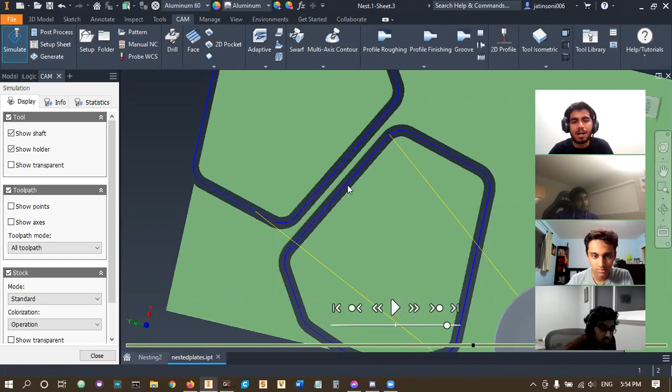What would happen if we didn't set this? You could have a situation where the two parts are way too close and your end mill basically cuts away part of the other part. A second situation is you don't have this middle web, this thin piece in there, and basically this piece here would be alone and it could just fly off, right? So that's something else that's dangerous we want to avoid, and that's where the nesting thing helps. And so that is all of our CAM done.

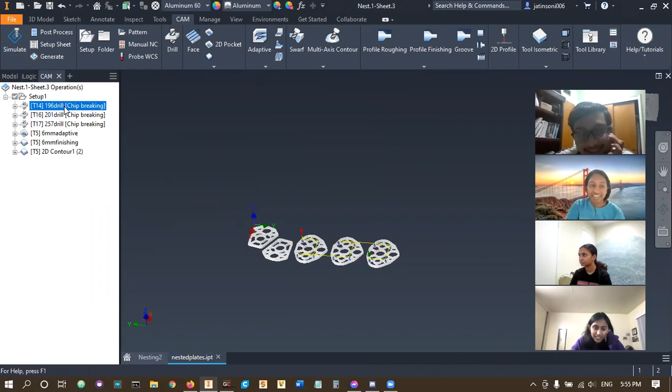Now, does anyone remember how we post-process? A different voice than Arnav, Jacob. Jasmita, were you there last time? Okay, then give it a try. You have to unmute first. What is this? I don't know off the top of my head. Oh, you don't know off the top of your head? Okay. Do you remember what this step does?

Okay, so it's like compiling, if you take coding classes, right? We define that we're going to drill this hole and we're going to drill it this way and all that. The machine doesn't understand that because it's way too high level for it, so you have to convert to what's called G-code. It's like binary for a computer, but it's G-code for a machine. So you click on what you want to do, hit post process, and this tab opens up.

So there's a couple things here. The first thing here is kind of like what compiler you're using: how it's going to convert everything. This depends on whatever machine you use. You see there's all these options here. We use the Laguna, so we have to select the Laguna. Inventor has some of these posts already there, but this won't be there by default.

So what you have to do is go into files. You have to find your parts library: GrabCAD, parts library, CNC, post processors, and there's three. There's Laguna for the Laguna CNC, there's CNC Router Parts for the Omeo, and then there's Glowforge for our laser cutter. But I haven't used the laser cutter, so I can't help you much there.

You have to ask Shinta for that. But yeah, you take the Laguna file or the Omeo one, or both, and you Control C, and then you go to this piece. You go to your C drive, users, public documents, Autodesk, Inventor, CAM, posts, and there's all the .cps files. There is chat.

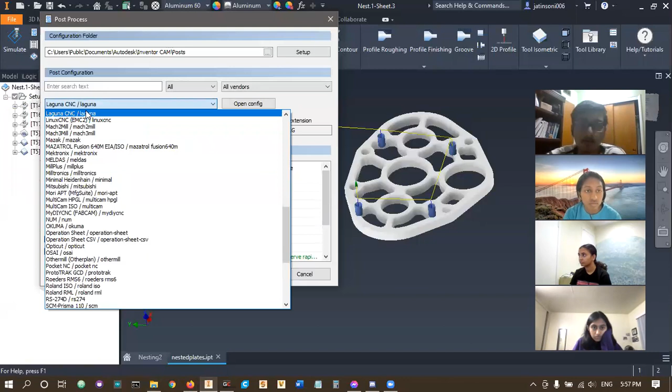And so once you do that, it should show up here. So Laguna CNC shows up. And make sure whenever you start Inventor for the first time, it will always be document unit. You want to change this to millimeters because both of our machines run in millimeters. If you don't change it, your part's going to be like this small because it's cutting 4 millimeters instead of 4 inches. There is another chat.

Could you show what you do if you were to use the Omeo? Oh, okay. Yeah, so I actually don't have the Omeo one in here, so I'll have to go through that step again. So documents, GrabCAD, parts library, CNC, post processors, CNC router parts, Control C that. And then we go back to OS, users, public documents, Autodesk, Inventor CAM, posts, and we paste that there. And then now in Inventor, if we scroll up, CNC router part should be there.

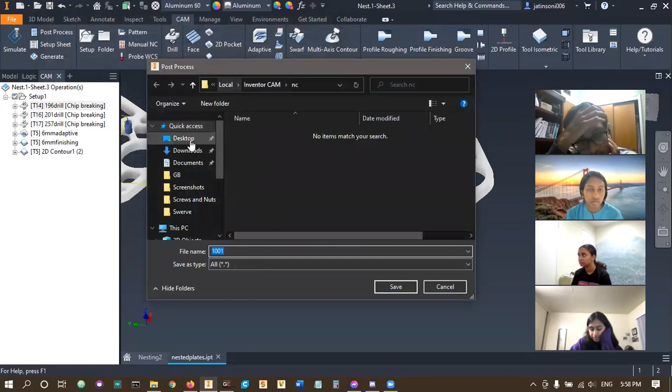I think I have to cancel and reload it. So click that, post process. There we go. I think it works now. There it is, CNC router parts, that one. And you do the same thing, millimeters, post, and then here. So what I would like to do is create a new folder for whatever I'm cutting. So let's say this was WCD gearbox 1, right? Or comp plot or something. You give it a name, a folder, and then inside there, you post all your operations.

Now, this is where we have a naming convention. It's like our own thing. It's not fully standard, but this is actually a useful naming convention. I'm not saying the CAM one isn't useful, but it's definitely not as useful. So the first thing is a letter, and that's the order in which you're going to cut everything. So this would be A, because it's the first thing we're doing. And then you do the size of your tool. The reason for that is if I were to cut this and you were the one who cammed it, instead of you telling me I'm using these 5 tools, I can just look at this name and see what tool I need to use. So I would just do 196, drill, and then save that.

And the reason why this is useful is if I were machining and all I had was that USB, I would put this in the controller. I would see it's A, so I have to do this first. I have to use the 196 drill, and it's good to go. So you do that, and then you would do the same thing for 201. You just change this to go to the right folder, and then we'll change this to B, 201 drill. I won't bore you with the other one.

And now the adaptive and the contour and the finishing one, they're all done with the same end mill, so I could post-process all of them together. So you would click the first one, press shift, and then select all of them, post-process, post, and you just do, where did it go? So you could do like C, 6mm contour or whatever you want there. And that would be good to go. And then you could take this folder, put it on the USB, and you can machine it yourself, or give it to someone else, and they should be able to do it.

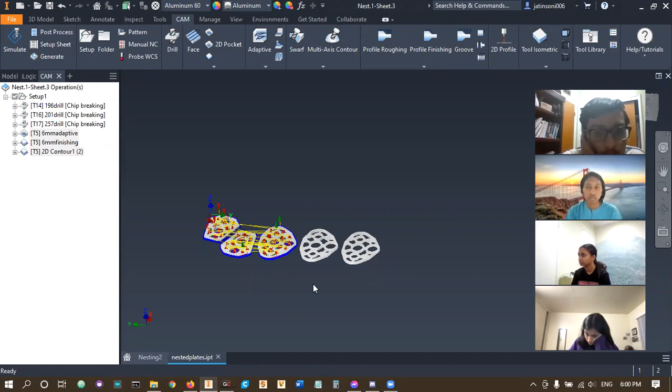What would you do when you were post processing that? Like you were saying how it gets overwhelmed with so much stuff to do. Oh, that, yes. Okay, so if this were on the Laguna, if I did all these 3 at once, there is a high chance, because this is such a large file and it has to do all these different steps, that it would forget or it would just stop in the middle. It's happened a lot, unfortunately.

So the way you would avoid that is instead of selecting all 3 at once, you would just select this one, post-process it, and then maybe select these 2, because contours are pretty easy, so they're fine. But the adaptive ones is where it starts to cry. But yeah, that is day 2 of CAM.

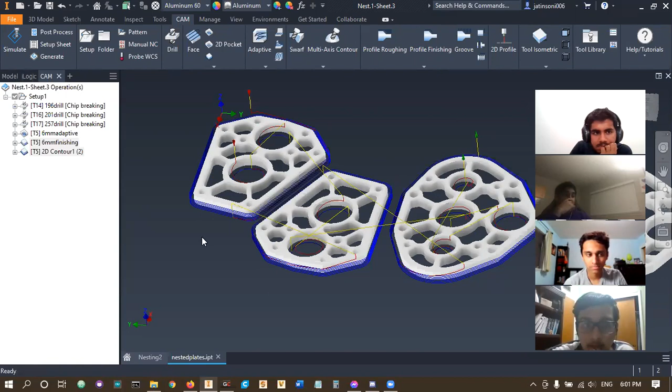Do you guys have any other questions? I have a question. Under your list of operations, what is the 6mm finishing? What does that do again? So remember, in our adaptive, we did stock to leave. What this does is it takes the size of everything and cuts it 0.005 inches less. So this bearing hole is 1.125 inches in diameter. It cuts it to 1.12.

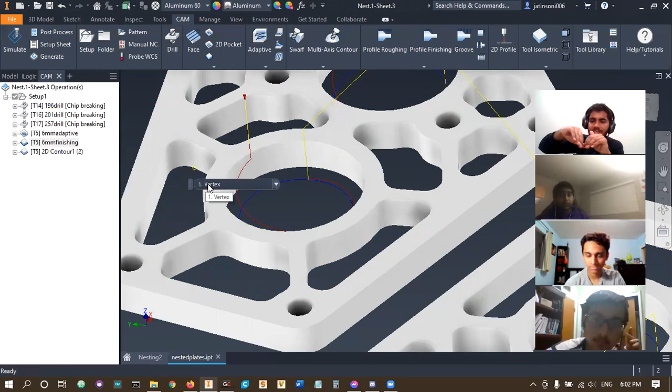And the reason why we do that is so that we can cut that adaptive super fast and go super aggressive, so the final finish is bad because it's going super fast, trying to cut all this stuff at once. But then this finishing comes in and cuts that last 0.005 inches to put the icing on the cake. It does this really slow and nice finishing pass so that everything looks really good. That's the point.

And the last one, the 2D contour one, that just cuts out the outside, right? Yeah, it just cuts out the outside final shape that's there. Okay. All right, thanks. Any other preguntas?

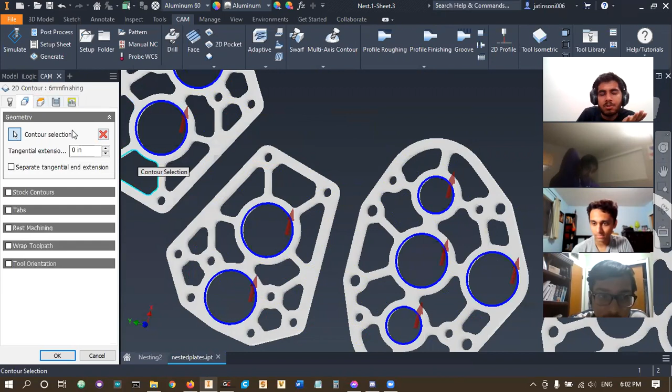For the adaptive and finishing, the stock to leave, if you change the amount that you have in adaptive, do you have to change something in finishing? No, you don't have to change anything in finishing. If your adaptive is there, it'll just cut whatever's there, and then finishing would just come in and change whatever is there. The only problem would be if you change it to, let's say, 0.01. That's twice the amount. These settings here are for that 0.005 inches, like the speeds and everything.

So if you were to make it bigger, you could try it at first. And if it seems too aggressive, you probably want to cut it down a little bit. So that's the only thing you would potentially have to change. But 0.005 inches, so far, whenever we've done it, it works. So you probably won't need to change it. If you do, you just need to change the speeds a little bit.

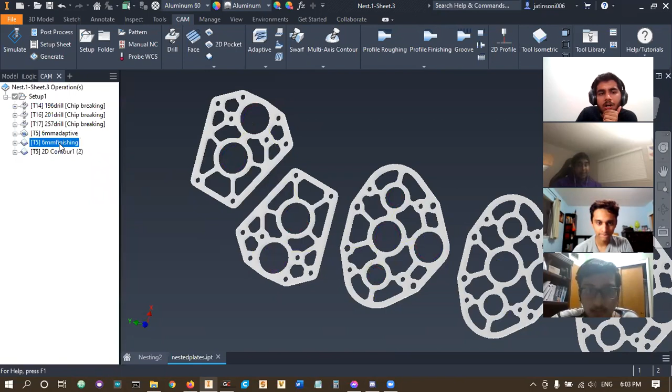Oh, what I was asking is, if you were to change it, do you have to change something in terms of how much it cuts in finishing? Oh, no. The contour basically uses your CAD file, and whatever your CAD file says, it'll just cut to that size. Okay, I see. You guys have any other questions?

Ritvik, so are we gonna do a day 3 of CAM, or what's the plan? Looking at it, all they need to do is 2x1s, and we can give them an assignment, right? Yeah, an assignment, like you guys can just practice on your own. Just find a CAD file, cam it, nest it. I guess we can have a third one. Yeah, we can do a final day of doing 2x1s.

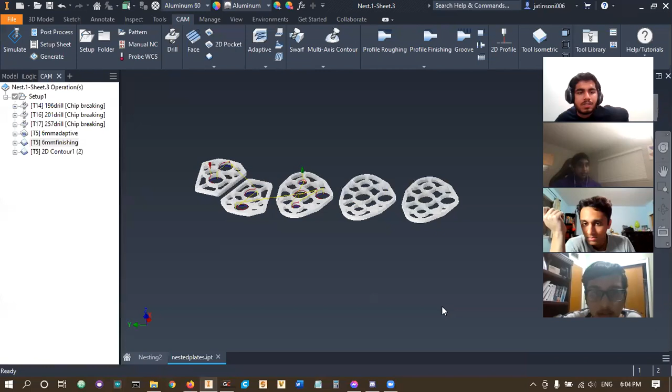2x1s are almost the exact same thing. The setup is a little bit different, but everything else stays the same. 2x1s are actually less work in terms of CAM. This is probably the most work you have to do in terms of CAM. The challenges that come with the 2x1 are more on the actual CNC. So you guys are lucky about that, because there are some other specific things you need to learn with the machine.